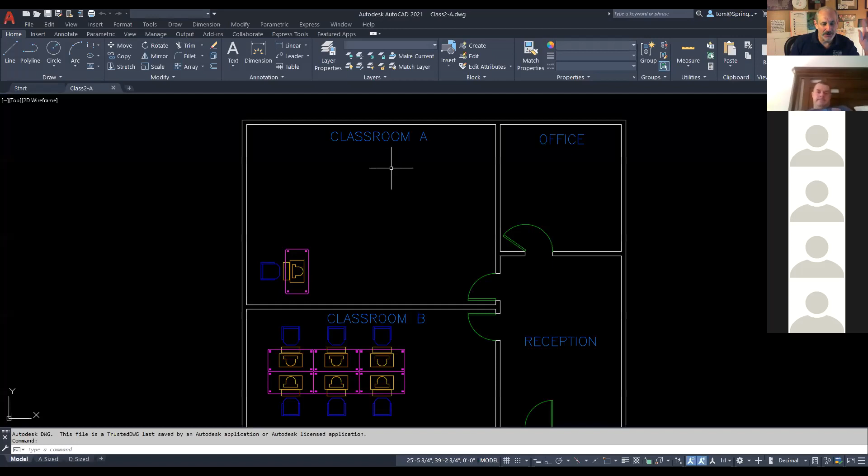Now, let me show you something here. This is something you might not know. But if I go right here, and if I click here, I can go and look at the drawing utilities, and I can look at the drawing properties. Now, the drawing properties right here, I get the general drawing properties. This tells me exactly when it was created right there. It tells me exactly the creation date right there. It tells me if it's been modified, and it tells me the size. Okay, so that's how that is right there.

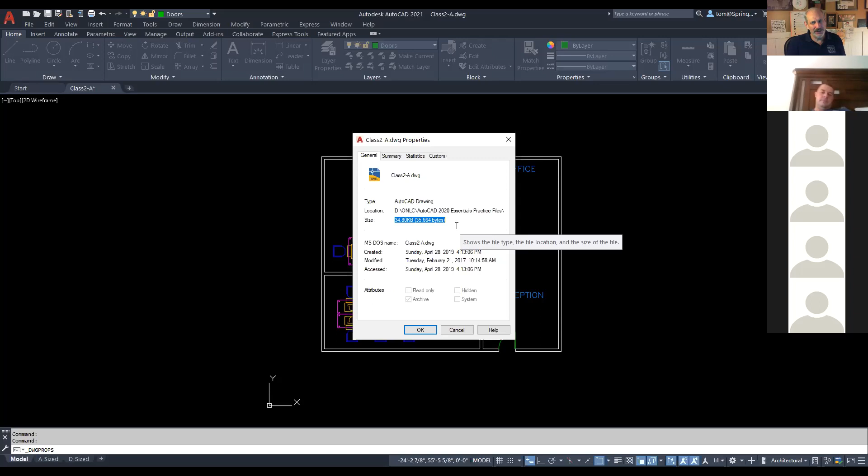Okay, now here's the thing. I had two students that handed in files that looked very similar. So I looked at this, they were identical. They had the identical start date, and then it had the identical size. Okay, this is the thing. I don't really want to do this. I have better things to do with my time than looking up to see if you're cheating. Just don't cheat because I'll find out and I'll fail you.

Okay, just act right. The number one rule in this class is act right. That's really all you have to do. If you act right, everything works out good. So that's it. We'll keep it simple, and we'll do this.

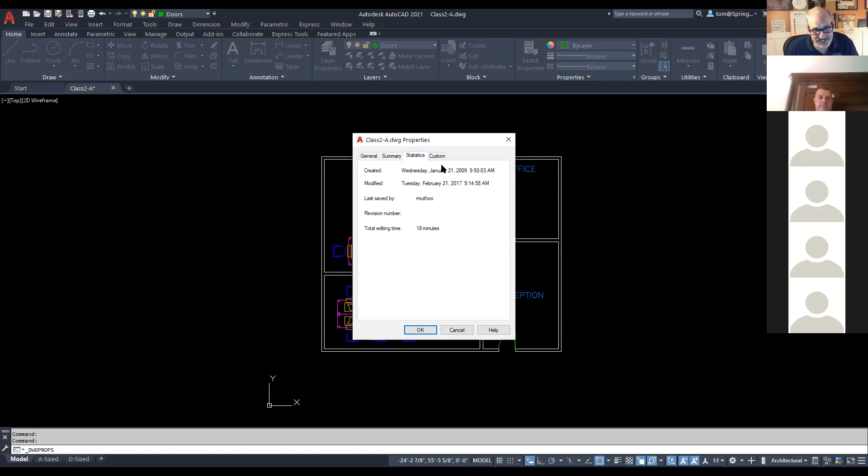And then I've got these statistics, and I can go ahead and find out all these kind of things here. Pretty cool stuff. So anyway, yes, there's all kinds of ways I can find out if you're cheating. I've been doing this a long time. I've been a CAD manager. I've been a CAD professional for a long time. So just do the work. You'll be okay. If you have questions, ask me.

That's all. And just learn the stuff, and you'll be okay. Okay, so that's how we have that. I'm going to go back to here, and then go back to where we were, back into this right here. So back over to this. And now we're looking at this, and we have this information, and that's about it. And now as far as this goes, I've got the basics that we're going to be going every week, and I've kind of updated this. This is here. This is still current. This will actually work. There might be some tweaks to it, but that's pretty consistent. That's what I've had right there. So anyway, that's what we have. Okay, so that's the deal right there.

And that is what we're going to be working on. Are there any questions about this before we move on to the next thing? We good to go? Okay, let's do this.

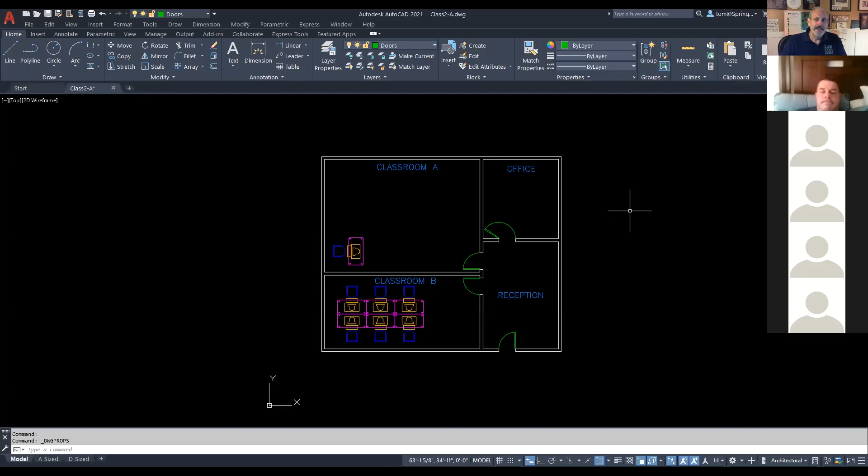So when you get into AutoCAD, what you're going to do is this. I'm just going to close out of this class 2A. Save changes, no.

This is what AutoCAD should look like when you open it up. By default, AutoCAD is going to look like this when you install it. Now, if you're actually dialing into the school and using a school copy, they may not have given you the Start tab.

So in that case, to actually start something in AutoCAD, you would use one of these two items right here. You got New, which will start a new AutoCAD drawing, or Open. Those are the two you'd have, New or Open. I've got some of each, so you got New and you got Open. You can use either one.

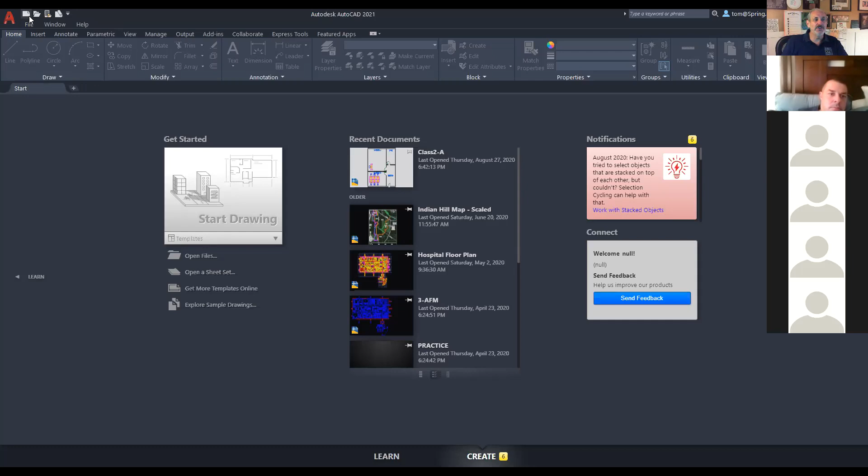Okay, so here's the thing. When you get into AutoCAD, we're just going to go ahead and go to New right here. We'll click on New. Now, when you start AutoCAD New, watch this. You click on New, and this is what's going to happen. Now, let me stop. Full stop.

What's going on here? AutoCAD is now asking you to select a template. When AutoCAD asks you to select a template, that means there are many templates available out there. For right now, we're just going to use this default template, acad.dwt. This has been the standard for AutoCAD for 30 years, since I first started using it. So I'm just going to go ahead and click on Open.

Now, when you open AutoCAD, it looks like this. This is what AutoCAD looks like. Now, there's several things you need to make sure you turn on, which will not be on by default in AutoCAD. Let me show you what they are.

So let me go back to here. What does he mean by that? So go to here, share this. All right, well, first of all, down here, these are your coordinates right down here. You'll see the coordinates, there are a couple of numbers. When I move my cursor, it basically changes.

This is your X and your Y value. Notice that down here at the lower left, you've got the X and you've got the Y. Let me go ahead and do this. So X and Y, so down here, can you guys see my red pencil right here? Yep, okay, this is your X and Y.

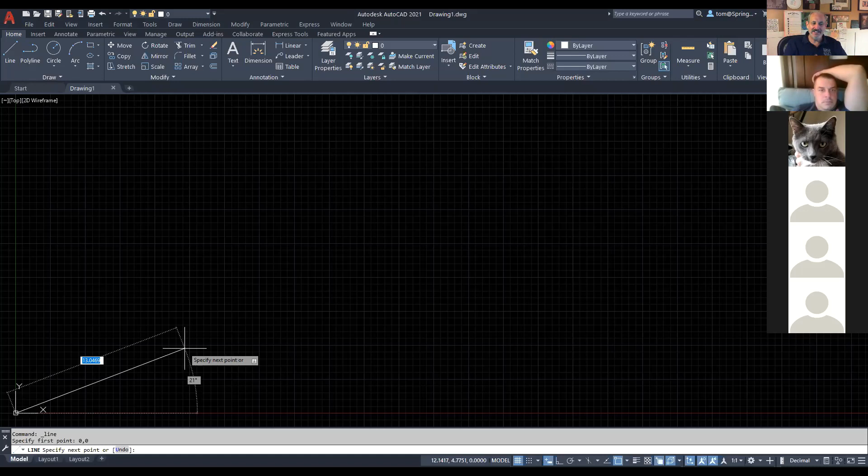So then where's that going to go? I hit 0,0. How do I pull the trigger, how do I make this command work? Well, you hit the enter key. I hit enter and notice where it is down here - now it's pinned right in the lower left corner.

Now let's say I wanted to go 3 units over and 3 units up. I'd type in 3,3 and hit enter. That's 3,3 right there. Now let's say I wanted to go right 3 units but not up or down at all. I'd say 3,0 - the 0 because I don't want to go up and down at all, just over to the right 3. So 3,0, hit enter, and it does that.

This is how your coordinates work - always an X and then a Y. You can control anything in AutoCAD as long as you understand that. That's an important thing right there.

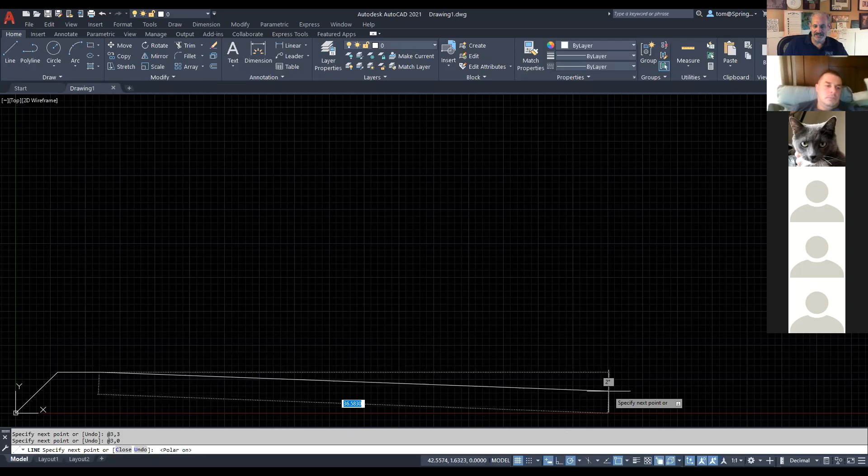Now I'm going to go up, and you'll notice it's not locking in, it's kind of trying to get there. The reason is there's a tool particularly used for this called polar tracking. I just hovered my cursor over it - this is polar tracking. Polar tracking allows your cursor to go straight. So I'm going to click on that. I'll hover my cursor over it so you guys can see it - polar tracking.

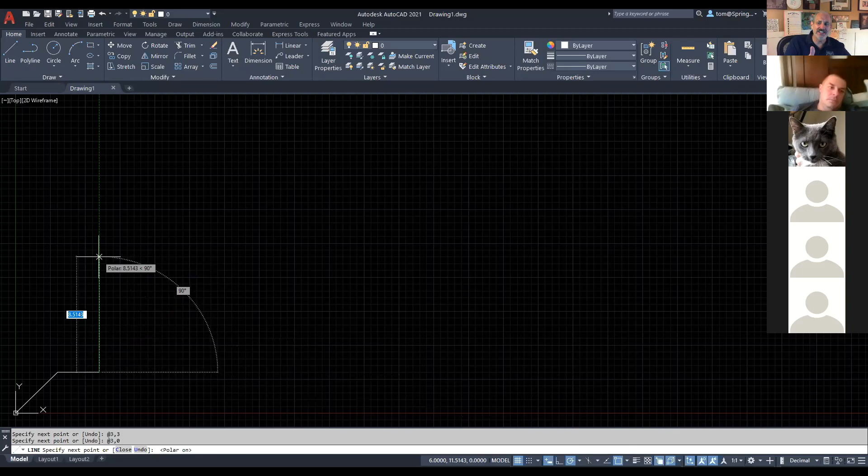Let's do this. Now watch this. I pull it straight up and watch what it does. Boom, locks it in. Right now at no time do my fingers leave my hands. What's happening is I'm getting this dashed green line called a tracking vector. This tracking vector is telling AutoCAD to keep this constraint at 90-degree increments. Now how far do I want to go? Let's just go 5, like that. Then I can pull it over here to the right, type in 5 again, boom. So working with AutoCAD is that simple.

You just have to know how to control it. I just showed you some very important skills right there. So coordinates, you want to make sure your coordinates are turned on, which are right down here.

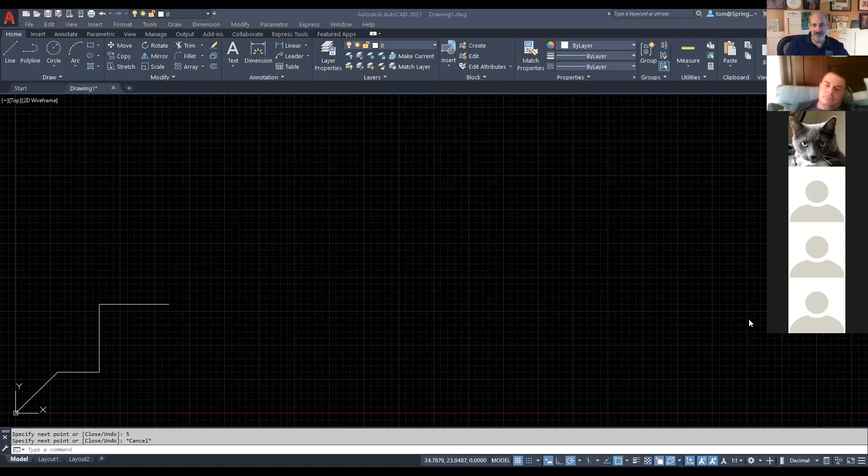How do we turn on coordinates? Down here at the lower right corner of your screen, I'm going to show you this again. What do I want to do? I want to annotate this if I can. Yeah, let's use this. Down here at the lower right, I'll circle this. See that right there? At the very lower right part of the screen, I have 3 horizontal lines.

I've got 3 horizontal lines. When I click on them, this is what I get. It goes into customization, and here are the different tools you have available. So coordinates, you'll notice, has a check mark, so mine's turned on. If you have it turned off here, you'll notice it's gone now, you don't see it anymore. So you want a check mark in coordinates.

Then you also want to go down here and turn on dynamic input. Right down here, watch this as I click on this. Dynamic input turns that on and off right there. So I want to leave that on.

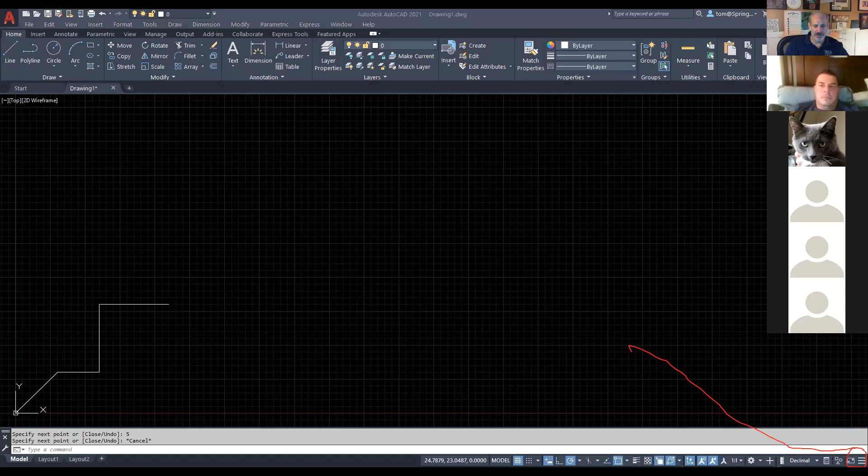And then the next one down here, let's see. What's the next one I have here? Let me change this real quickly here. Go to new share, and I'll go back to where I was, back to the AutoCAD tweaks, and I'm right back to here. So I've got coordinates, dynamic input, line weight, and units. Those are the 4 I want turned on. So I'm going to make that happen, going back and forth between these, and turn on those 4.

So back over to here, coordinates right here. And then I've got dynamic input, and then I have line weight. You want to turn line weight back on and off, so you want to have line weight on. And then down here, you want to have units on. Units is right here — units tells me whether I'm using architectural, decimal, or civil units right down there. So we leave those on. Those are 4 things you want to have on. So those things you turn on, make sure they're turned on, and you leave them on.

Okay, now moving on to the next thing. What else do we have to tweak AutoCAD to make it work? These are just the basics right now. We're going to get into using AutoCAD a little bit further.

So then the next thing is the command line. By default, your AutoCAD will probably come in without your command line docked, so you want to dock it — actually dock it. Docking means it fastens itself to the bottom of your screen. So you want to dock it. We'll go back to that. We'll go ahead and go to here, and we'll dock that. Now here's what I mean about saying what it's going to look like. By the way, you guys can see AutoCAD now, right?

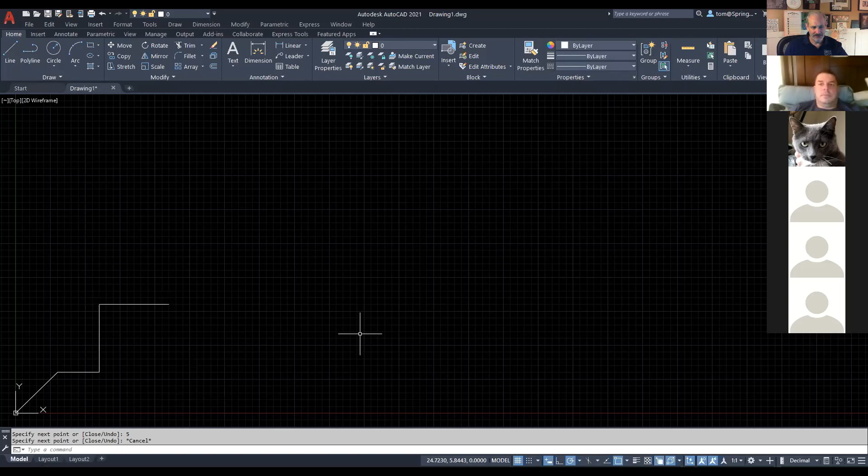Okay, thank you. All right, here's what it's going to look like, kind of off the bottom right here. Now here's what I'm doing right here.

Notice at the left corner of the command line, it has two columns of dots. When you click, you can drag it, click and hold it down and drag it to wherever you want it to go. If you drag it down to the bottom of the screen like this, you'll notice as you drag it, it turns into a hollow rectangle. When it does that, you let it go and it docks. So you want to dock it.

That's the next thing. Now here's the next thing: you want to have at least three lines of commands with your command line. So, 1, 2, and 3 - I got 3 right there. So you want to tweak it until it's 3. That's the next step.

Next step, and then we'll go back to here. So what else do we have for the tweaks? You want to show your menu bar. You can actually show it here. You can also show, there's another thing I'm going to put in here, and that is your layers. So I'm going to show you your menu and your layers right here, and then I'm going to move on and start some instruction.

So what am I talking about? Well, up here at the very top of your screen, let me see if I can move this. Very much at the top of your screen, you'll see this. Can I move this? Let's see here. I don't know if I can. I've actually got this thing right here, I don't know if I can move it. Can I move it? Yeah, there we go. So I'm going to go ahead and move this over to here.

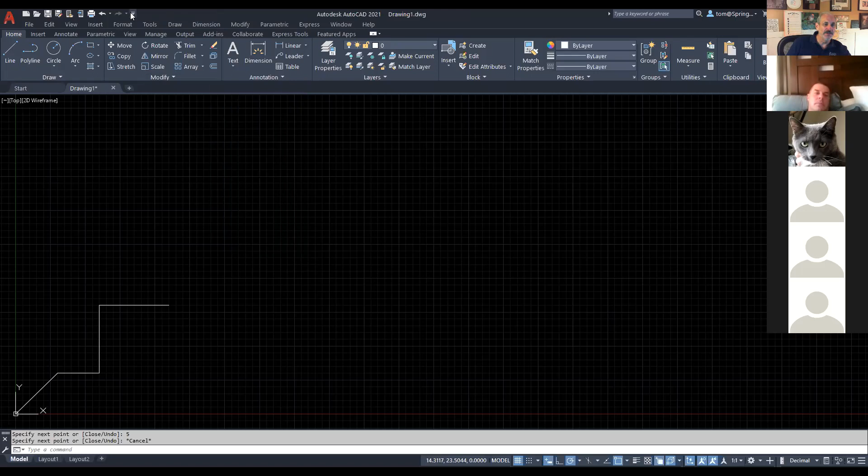Number one, I'm going to have you turn on - let's see, I've got the layers turned on right here. You will not have that turned on by default. So if you go here, one thing you want to do is turn on your layer right here. The reason why is it gives you access to your layers no matter what part of your ribbon you're on. Just trust me, you want to do it. So the layer, that's what that did right there.

Put that right there. Also in the quick access toolbar is this right here - you've got show and hide menu bar. Right now my menu bar is hidden. If I go here, I can go to show menu bar and it opens up. So I've got those right there. Anyway, those are the basic elements to get you in the ball game for using AutoCAD. So that's how we get started.

Boom, done. Okay, now the next thing I want to do is actually show you guys something else. I'm going to go through this by going into a new share, and we're going to talk about some of the basics of AutoCAD 2021. We're going to go through the essentials, okay? So right now, just take a deep breath. I'll try to get us going as quick as we can and move us on.

So, AutoCAD 2021, down to here. We're going to get started with AutoCAD. First of all, we just completed the basic initial setup of the drawing environment. We had an idea. I'm going to describe the basic layout and what's going on, and then we're going to locate a few points and so forth. So let's go through this. We've seen that you can open up AutoCAD. I don't know if you guys all have AutoCAD open, but if you do, go ahead and open it right now.

I'll give you about 30 seconds, and I'll talk while you're doing that. Once you get AutoCAD open, it's going to look like this. AutoCAD will be up and running, and I'm going to erase this so it looks basically the same. Then you're going to go through the tweaks I just showed you to make that work. If you're still on the start screen, just go up to new, like we talked about.

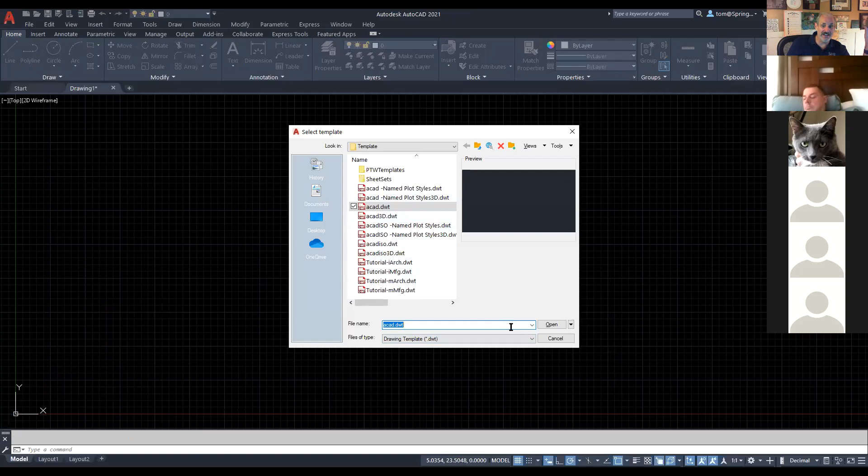Go to new and start one from acad.dwt just to give you a blank drawing. That's all you have to do. Now that we've got the basics, I'm going to show you some other interesting things. You've got the basic idea of AutoCAD.

So now you're in it, kind of running around, not just thinking, okay, well, so what? Well, here's what. We're going to talk about a few things. First of all, let me talk about some of the elements that are actually out there.

So I'm going to go here and talk about this, and go back to here. As you get into this, you've got the start window, which you should have by default. Then the next thing you're going to have is these different elements of the screen.

Number one, up here at the upper left, is the application menu. That's how you access different file functions typically. I'll go here and show you what the application menu does. It's up here, this red letter A.

We go here and it's got all these different items. You will not see all of these if you're just on the Start tab, but you've got New, Open, the Save floppy disk, Save As, Import—this is how you import items into your drawing if you need to—and Export. You can export items out as DWFs, PDFs, DGNs, and other formats. You can do all that.

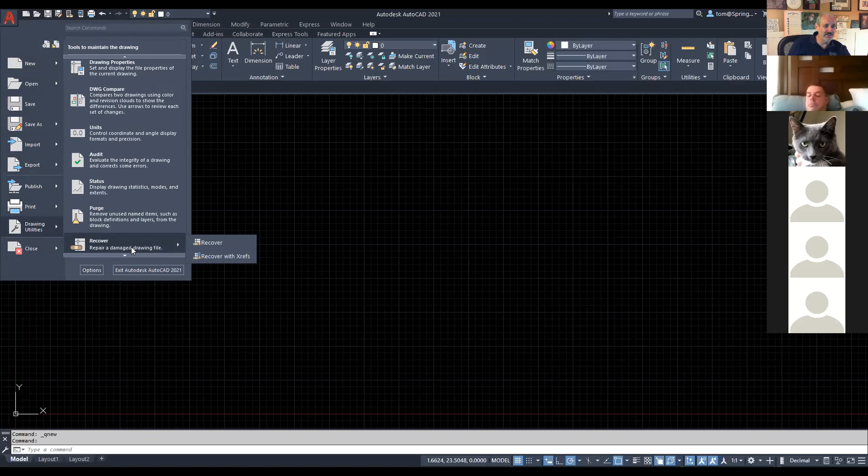You can publish, print, and here you've got some drawing utilities. Part of these drawing utilities allow you to go ahead and recover damaged drawings, and you can also do things such as deal with your units and so forth. So you've got all those things going on. That is your application menu.

The next thing I want to point out is over here. We talked about the application menu, and the next thing we have is number 2, which is actually the drawing area and the crosshairs—this whole area where you actually draw, where your crosshairs show up, and then you have prompts. After that, item number 3 is the drawing window, and then we have the quick access toolbar. Let's take those in real quickly.

Going back to AutoCAD, what you've got right here is this whole area where I'm moving my cursor—this is the whole drawing area, all the screen for drawing. You'll notice my cursor looks like a plus sign with a square in the middle. That's your cursor. And if I have a command going right now, watch this.

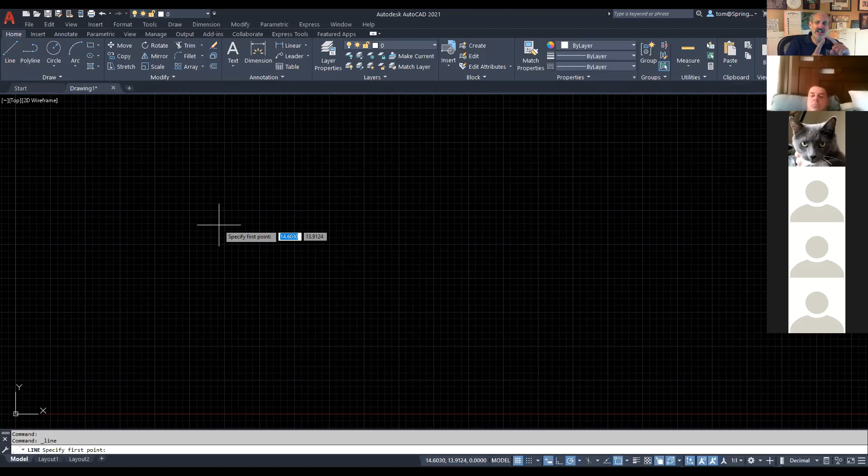If I start the line command, for instance, you'll notice I've got a plus sign and a prompt at the lower right. The prompt is telling me what AutoCAD wants me to do right now—it's giving me a clue, telling me exactly what I'm supposed to do. It says specify first point, and I can type in a coordinate if I want to, like I showed you before.

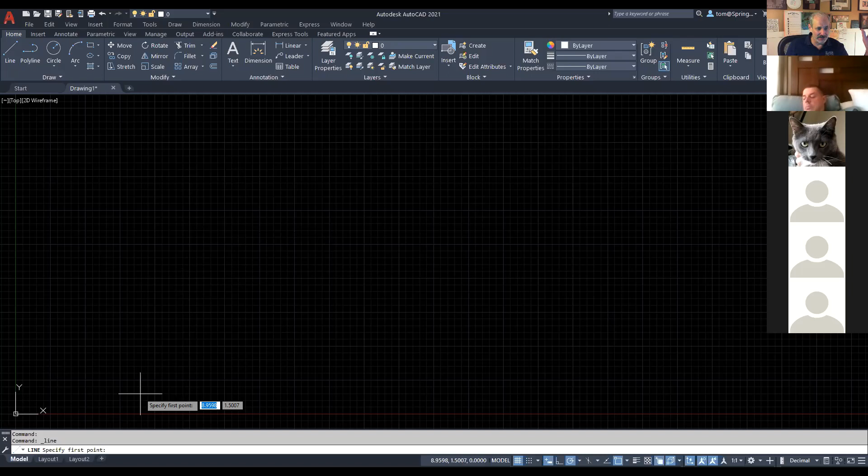Now here's something that's very important. Look down here, where it says line, specify first point. What's going on down here? Well, the same content is right there, and all this is being controlled by this.

Please don't lock up. Please don't lock up. Oh no. Hello, hello.